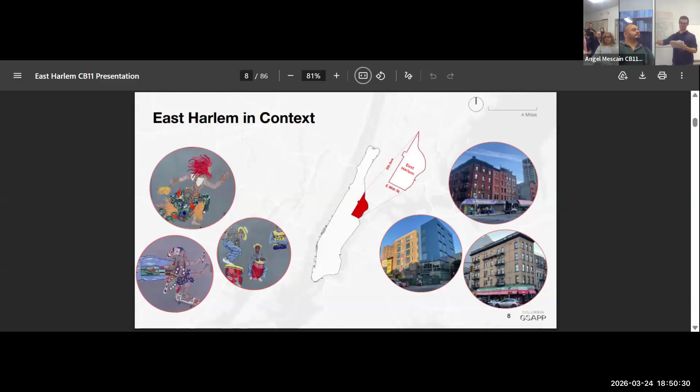So locating our site, we're focusing on East Harlem, a culturally rich neighborhood located in Upper Manhattan, as all of you very well know. This neighborhood is represented by community board 11, which is bordered by East 96th Street to the south, 5th Avenue to the west, and the East River and Harlem River to the east.

East Harlem has a very rich history of immigration, from being an enclave of Italian, Jewish, Irish, and German immigrants in the late 1800s to the Spanish Harlem we know today. Almost 100 years ago, a subway line along 2nd Avenue through East Harlem was first proposed by IND and approved by the New York City Board of Transportation. Today, we're finally seeing this long overdue promise begin to take shape.

East Harlem, El Barrio, is a neighborhood with a very vibrant past whose culture had a profound impact on New York City and the world at large. During our many site visits throughout the neighborhood, we felt that history in the murals, music, and the strong sense of pride that still defines the neighborhood to this day. Just like the generations before them, residents continue to make their voices heard in shaping the future of El Barrio.

We'd like to now provide a very quick overview of the 2nd Avenue subway, starting with phase 1 and the current status of the phase 2 extension. This massive infrastructure project, receiving $7.7 billion in investment backed partially by the federal government, will bring the Q line to East Harlem.

Phase 1 of the 2nd Avenue subway began construction in 2007 and was completed in 2017, extending the Q line to the Upper East Side with 3 new stations at 72nd, 86th, and 96th.

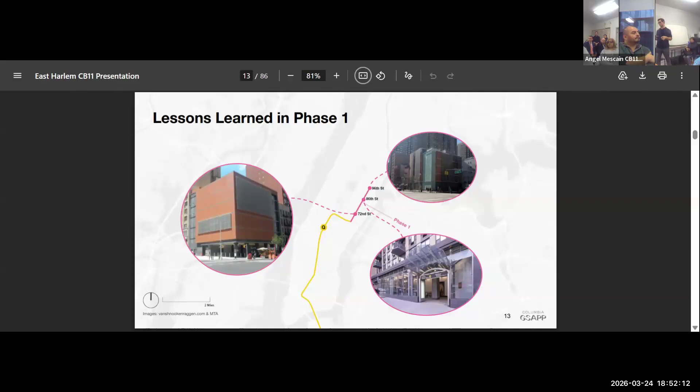From phase 1, the MTA learned the importance of using larger off-street staging areas to reduce construction risk and impacts. Not only will phase 2 use ancillary facility sites for staging before construction, but they also seek to design those ancillary facilities for future use as mixed-use structures with ground floor retail, to better activate and integrate these structures within the streetscape. So phase 2 will bring 3 new stations at 106th, 116th, and 125th and Lexington Avenue.

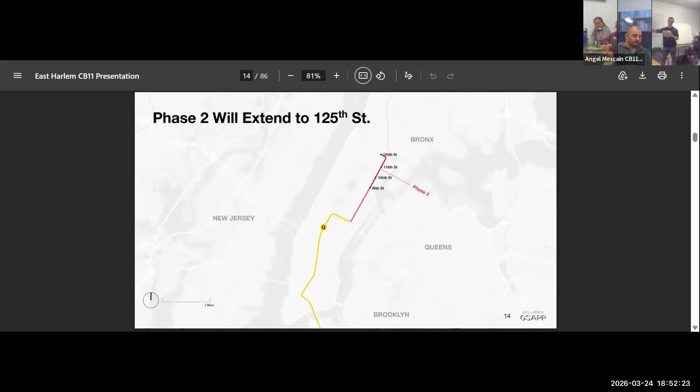So this is kind of where we are right now with the MTA - I think the MTA team will probably do a much more in-depth job of explaining this than I could. But the MTA has awarded contracts to relocate the existing utilities and to facilitate construction of the future 106th Street station, and constructing the structural shells for the 116th and 125th Street stations.

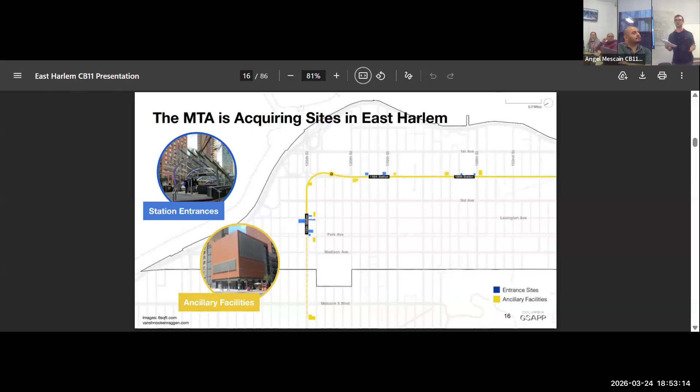Because of the larger building footprints required for the phase 2 ancillary facilities, the MTA anticipated more displacements and complexities in construction and demolition than in phase 1. To reduce displacement, the MTA has prioritized vacant lots and buildings for acquisition.

With these acquisitions, demolitions, and construction activities of MTA leading to disruptions along 2nd Ave, their outreach to the surrounding community has been all the more important. This has involved a grassroots approach that includes holding outreach and community meetings with residents, tenants, and organizations, and the Community Outreach Center.

In the acquisition of these sites, the MTA has projected a total of exactly 505 commercial employees and 170 residents from 65 residential units being displaced.

Currently, and this was at the time of creating this presentation, a month ago at this point, 4 commercial units and 4 residential units have been relocated, with 4 more residential units in process.

The acquisition of these lots will either be full or partial taking, depending on the MTA's needs for easement, staging area, and construction space.

The MTA's authority to acquire these properties through eminent domain is rooted in the 5th Amendment, which states that government takings of private property for public use must be justly compensated as well as follow due process.

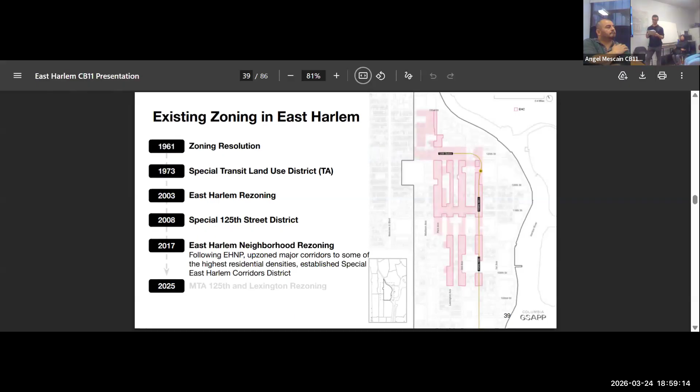The East Harlem neighborhood rezoning in 2017 upzoned major corridors to allow some of the highest residential densities in the area's history. It also created the Special East Harlem Corridors District to guide this growth along key avenues while, very crucially, tying development to affordable housing requirements.

In 2025, the zoning for specific MTA-acquired lots around 125th Street and Lexington Avenue was changed from C4-4D to C6-11, raising the FAR, or floor area ratio, to 15. This is higher than it has ever been before in the neighborhood and allows for substantially greater density and commercial intensity. This rezoning aligns with transit-oriented development goals around the Metro North and subway hub, reinforcing 125th Street as a major regional center.

By tracing this trajectory of East Harlem zoning history, we see both sentiments of anticipation for transit-oriented residential development and consideration for preserving the existing built form while balancing economic development.

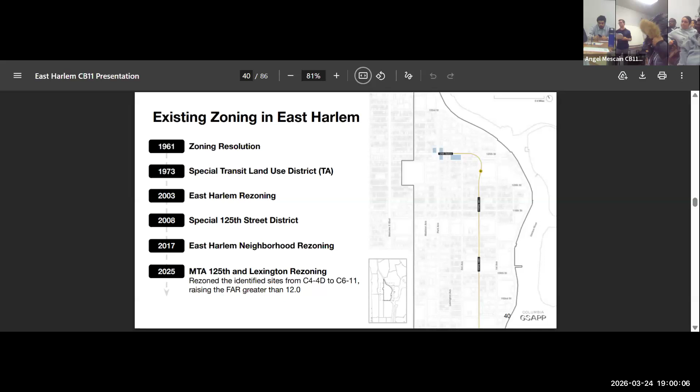And to talk a little bit more about the community, I'm going to pass it to my colleague, Charlie.

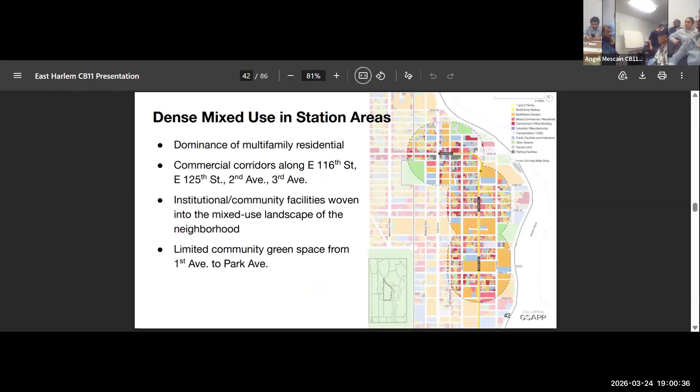Thank you, David. Just with these current conditions of East Harlem in mind, we move on to considering the voices of various actors involved in the Second Avenue subway extension.

East Harlem community members have expressed a number of concerns related to the extension. In the short term, residents and businesses are being displaced or relocated, and the streetscape is being altered for construction. In the long term, community members are worried about neighborhood change, the affordability of housing, and the design of MTA facilities.

The media is paying attention to this project. Local newspapers have highlighted the effects of the MTA's takings on both property owners and residential and commercial tenants. Property owners and the MTA are tangled up in courts, while tenants are informed that they have to vacate their apartments and business spaces.

Cheek Diop, a commercial tenant in a building set to be acquired for the 116th Street site and owner of the Tuba African store, also reports confusion arising from the property acquisition process. The MTA showed him several alternative spaces for a store, but then the communication ceased.

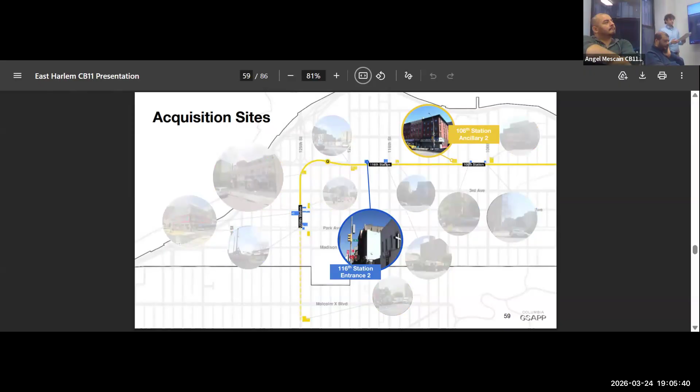The first of these sites was the 106th Street Station Ancillary Facility, located on the corner of 109th Street and 2nd Avenue, which will contain a ventilation plant. This site comprises 6 lots, one of which previously contained a grocery store. We chose to analyze the site because of the potential to bring back a grocery store to this area while capitalizing on fresh district zoning bonuses to provide extra affordable housing.

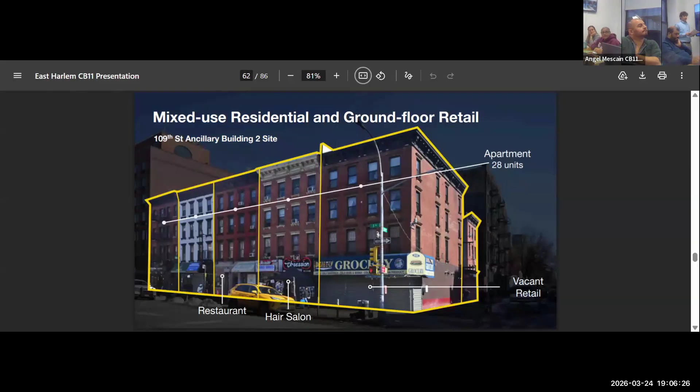Currently the site has a low density profile—note the larger buildings off the corner of this lot. Here we identified the 6 lots as currently hosting mixed-use properties with street-level retail and apartments above. There are a combined total of 28 residential units, but few are currently occupied.

Considering the zoning, the site exists within an R9A residential district, a C2-5 commercial overlay, the East Harlem Special District, and the Special Transit Land Use District, which, when combined, allow for a high-density mixed-use building with ground floor retail.

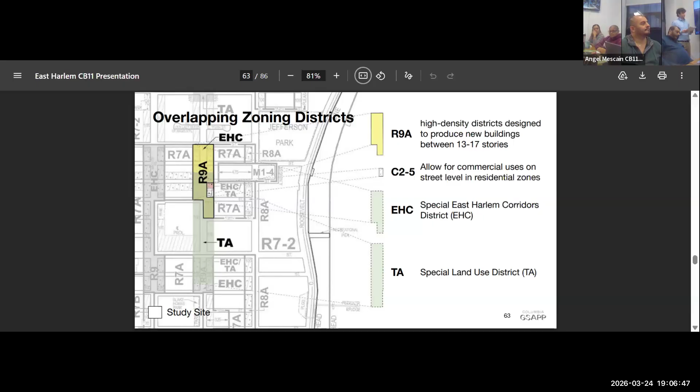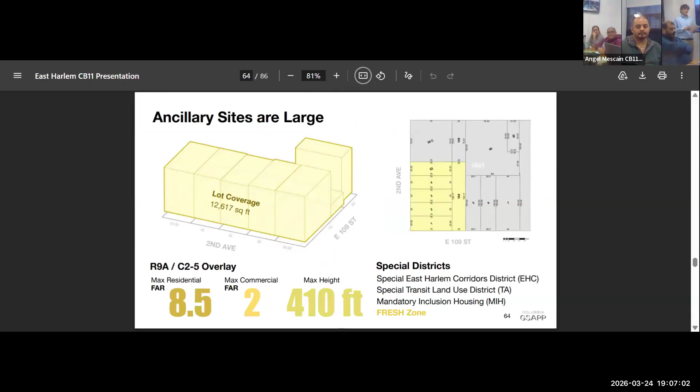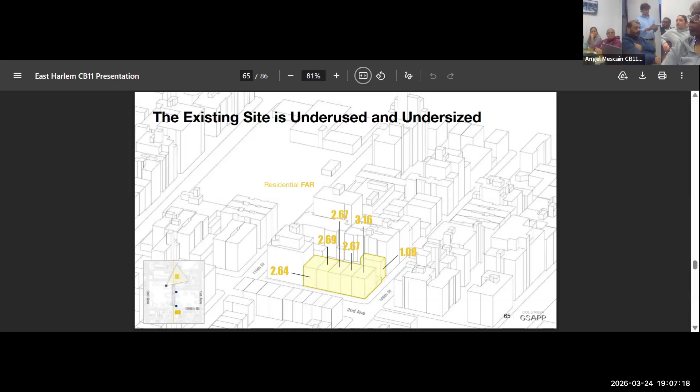We considered the combined site's large total lot coverage, maximum height, and FAR, by which the site could be developed given the overlapping zoning, which allows for a max FAR of 8.5 and a max height of 410 feet. This demonstrates that while the largest building on the site only has a 3.16 FAR, the site's zoning conditions allow for a much higher density.

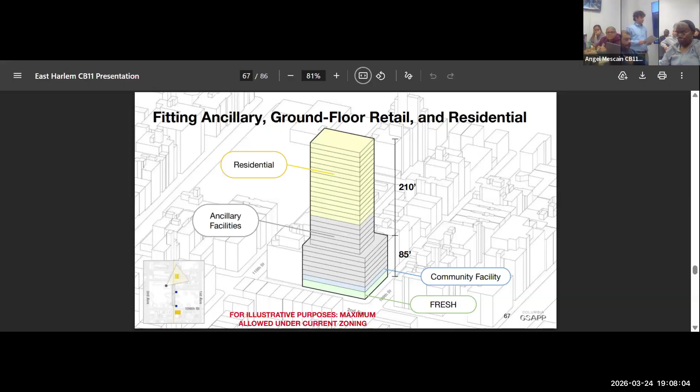Now we turn to 116th Street, our second site that we chose to analyze. We chose to analyze specifically Entrance 2, consisting of 4 lots located on the corner of 118th Street and 2nd Avenue. We chose to analyze this site in conjunction with the ancillary site to explore the distinct development potentials of different facility types, and because of the different zoning provisions that apply to this site, including a possible zoning floor area bonus through zoning for accessibility.

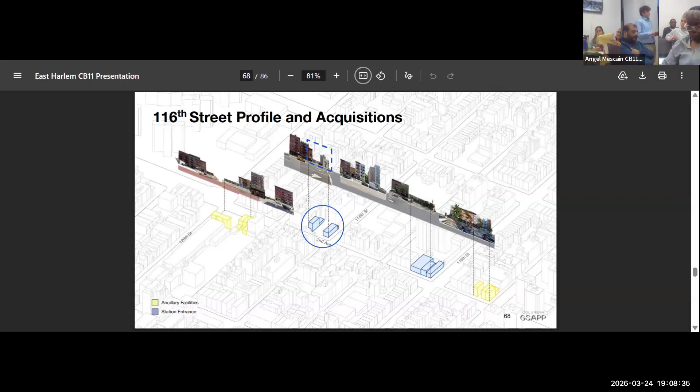Taking a closer look at the site, we observe lower density vacant lots. The current uses of this acquisition site include a 3-story mixed residential and commercial property, a church, and a parking lot. There are a total of 5 residential units in the apartment building to the left.

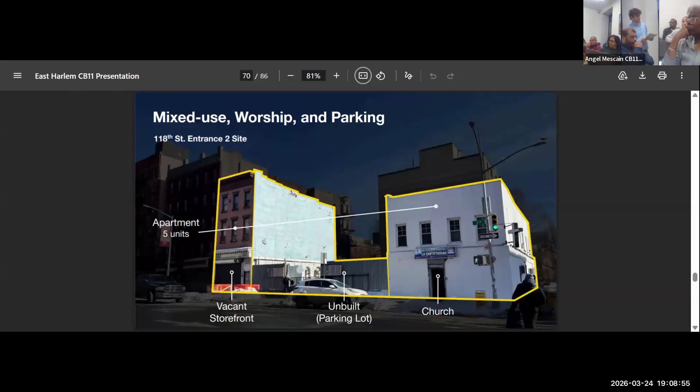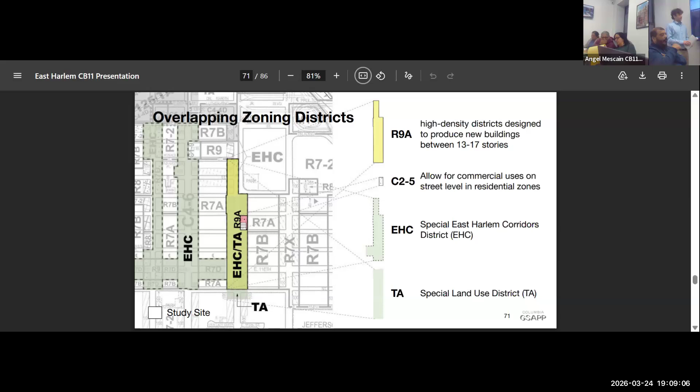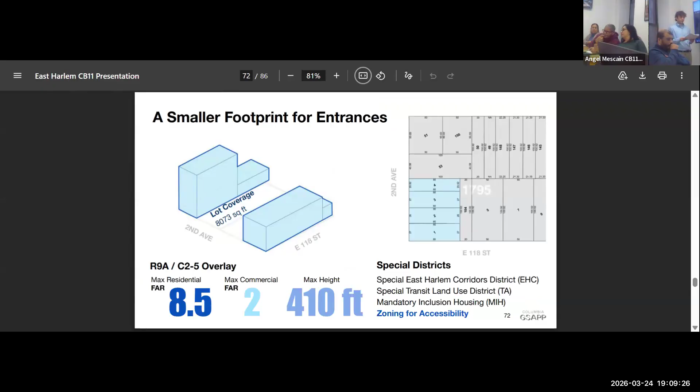So this entrance site falls into the same zoning designations as the 106th Street ventilation plant, similarly allowing for high density residential and additional bonuses. Although this site has a smaller footprint than 106th Street's ventilation plant, as an entrance, the MTA can take advantage of the zoning for accessibility provisions to work with developers on the site to include either entrances, elevators, or emergency egress in exchange for a residential FAR bonus of up to 20%.

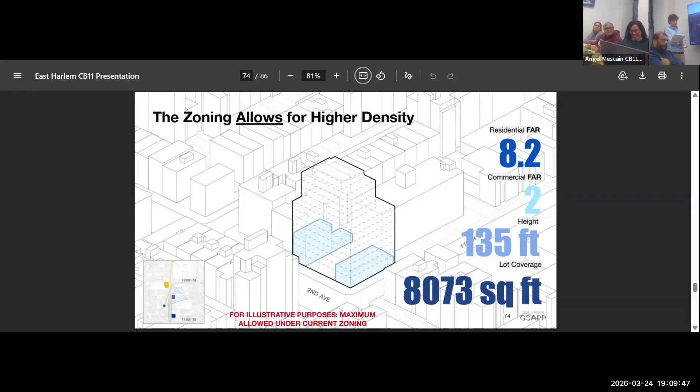Turning to this aerial view helps contextualize the underbuilt FAR that's currently there on site. The entrance site could take advantage of existing regulations and zoning bonuses allowing for higher density, placing a substantial number of affordable residential units and community facilities within immediate access of the new 116th Street station.

But how could we take these sites even further and imagine future development scenarios that could better address the needs of the community and the MTA?

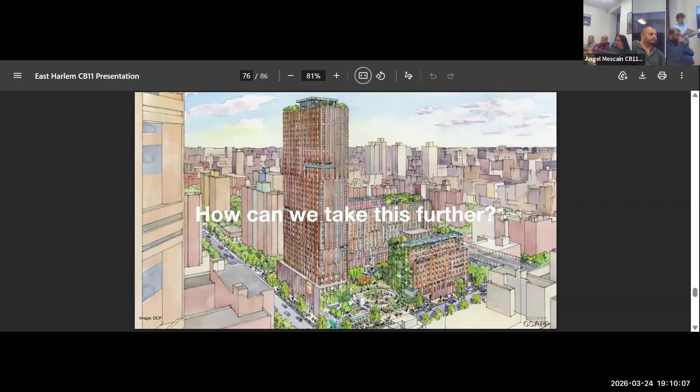The 125th Street rezoning may serve as a model for allowing for higher density that supports additional affordable housing development in an area overlaid with mandatory inclusionary housing. The rezoning, unanimously approved by Community Board 11, raised the FAR to a level unseen before in the neighborhood. An MTA proposal would bring a mixed-use residential development.

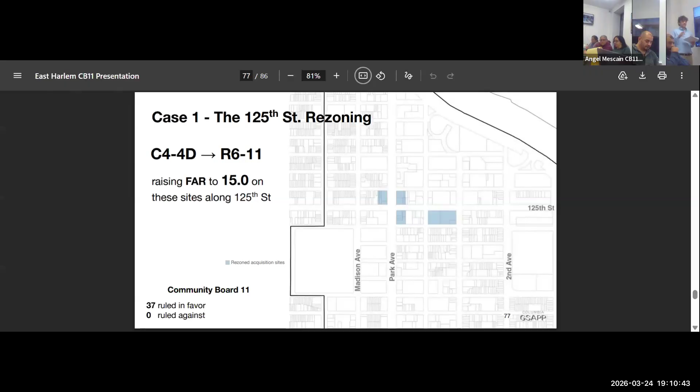It would bring a mixed-use residential development to one of these sites, including 684 units, of which 25% and potentially more would be affordable.

The construction of the National Black Theatre on 125th Street, following a rezoning of the current site through the ULURP process, serves as another use case allowing for higher density. This rezoning upzoned the site from a C4-4A to a C4-7 zoning district, and through leveraging zoning bonuses, raised the FAR to 12. It shows us what higher buildings may look like along 125th Street.

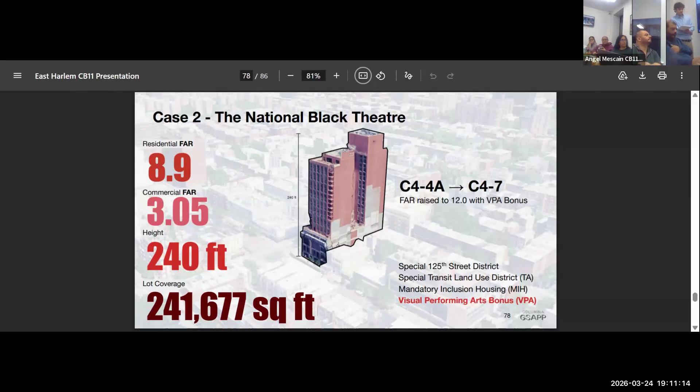We see future opportunities in using the MTA disposition, development, and city rezoning processes to increase allowable and built densities on ancillary and entrance sites along the Phase 2 extension. Given the complexity of zoning instruments, we hope to further explore opportunities in our next steps.

And so, returning to our charge. For the research we presented, we want to return to our initial charge and consider some of the pathways we've outlined for further exploring and communicating opportunities for creating public benefits to meet both infrastructural and community needs on these acquisition sites.

Moving forward, we are taking an iterative approach to refine our recommendations for Civitas on the 2nd Avenue subway extension with a focus on two key areas. First, we are expanding our zoning analysis across additional sites to test new possibilities that can ultimately lead to development proposals. Simultaneously, we hope to better ground our work in community voices, and we look to you for guidance on who we should be speaking with, which local organizations to engage with, and whether there are any upcoming events where we could listen and potentially join in on a conversation.

So let's go back to where we stand now. Through this presentation, we've considered the context in which this project takes place and where Civitas, MTA, and East Harlem's community interests meet, examined the tools at the MTA's disposal, defined our notion of public benefits, and highlighted a great need and opportunity to diversify the housing stock and retail options to make the area more livable for East Harlem residents, workers, and families.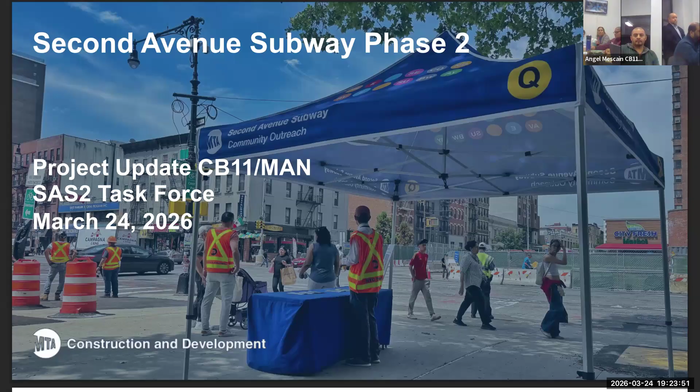So thanks for having us here tonight. My name's Joe O'Donnell. Like most of the community board already knows me from past presentations, I am the Director of Strategic Initiatives for MTA Construction and Development. We are the arm of the MTA that builds the capital projects and expansion projects for the MTA. I was part of phase 1 of the Second Avenue Subway project, and I am part of Second Avenue Subway Phase 2 and several other projects for the MTA. Around the room, I think we probably have half the room occupied with our community outreach team—community outreach representatives from Contract 1, Michelle, Alejandra for Contract 2. You all know Hector from El Barrio, he is leading up our community outreach efforts here in East Harlem. We're also joined by several members of the team in the audience, and online we have project executives as well as more outreach team members. So pretty robust attendance tonight—hopefully we can address most, if not all, of your questions. Next slide.

So tonight's agenda, we're going to do an overview and level set where we are with the project. For those who may not know, Columbia already did a fine job level setting where we are, so I don't want to repeat too much of their baselining efforts, but I'll cover a bit about the overall health of the project. I know we had an elected official briefing yesterday, and some community board 11 members participated, so some of this will be redundant, but for the rest of you we'll get everyone on the same page. We'll talk about major upcoming work on Contract 1, major upcoming work on Contract 2 now that it's been awarded and ramping up. I know there was a question about some of the ancillary buildings and their uses beyond power, communications, and signals. And then obviously community engagement and questions.

Next. So again, just the levels. Ooh, where we go? I thought I stepped on a cord.

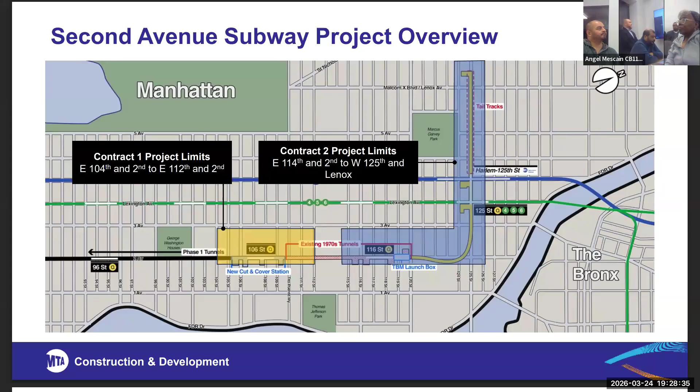Next slide. So as I mentioned, contract one was already awarded in 2024 to CAC Industries, and that is ongoing. Contract two was awarded in August of 2025 to C Plus Partners, and that is currently ongoing. You may have seen in the news, and we mentioned at our MTA Capital Project Committee on Monday, that we are ready to award contract three, which would build out the tunnels and stations for the 106th Street station area.

We are currently waiting on concurrence from the federal government. There's been some conversation with them about the funding for the project, to make sure we still receive the funding promised in order to move forward with that contract. We have confidence things will get worked out and we'll be able to proceed while we continue to advance contracts 1 and 2. But to safeguard our investment and the future of this project, we have filed an injunction in federal court to make sure that we get our money.

And then eventually contract 4 will come in and do all the fitting out of the stations and the testing and commissioning to get us up for revenue service. We project a revenue service date of 2032, which is less than 10 years away. I heard you say 10 years, but hopefully less than 10 years away.

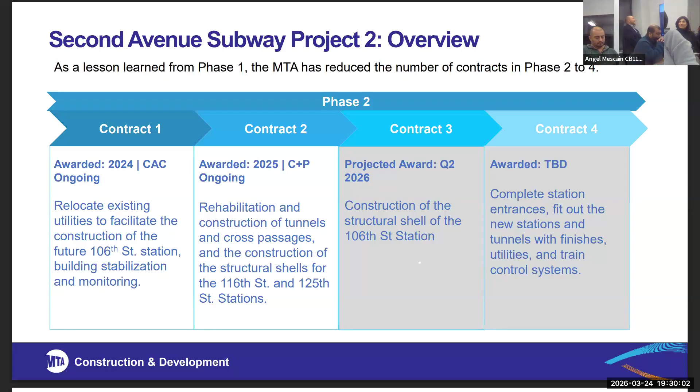Next slide, please. So the limits for contract 1 right now are 104th Street to about 112th, just south of 112th Street. As I mentioned, that's for the utility relocation in contract 1, also monitoring equipment for air, vibration, and noise. We're doing some building remediation. There are several buildings along the project alignment that we are not necessarily acquiring, but through investigation and communication with some of the business owners and building owners there, we've identified these buildings.

They're 100-year-old buildings on rubble foundations. They may not react well to our construction, which is going to be considerable in the area. So we're going to go in on the MTA's dime, no additional expense to the owners, and stabilize those buildings. There's the utility relocation, which is the primary objective of C1. Obviously, my friends over at Franklin Plaza, speaking to you, Leslie Cologne.

There is a whole host of MPT, or Maintenance and Protection of Traffic, which are those Jersey barriers and fences. We're pretty much inundating Franklin Plaza right now on three of the four sides of their properties between First Avenue and Third Avenue, with all the utility work going on there. And then there's the remediation of any environmental and hazardous materials, some asbestos and lead.

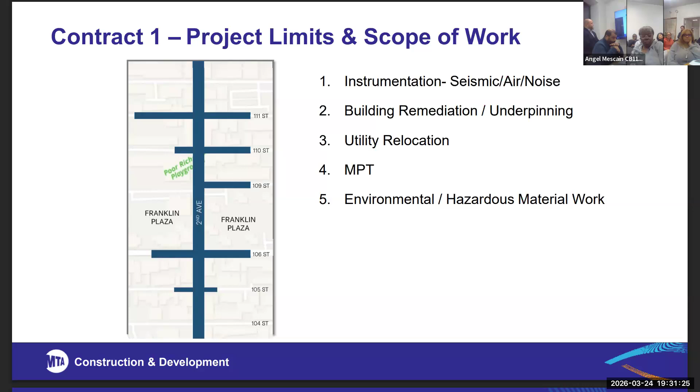Next slide. So, contract 1 update. Next. So here's some of the work that's going on at present.

Over at 105th Street, we're working on the gas main there in front of East Harlem Tutorial Program, working very collaboratively and collectively with the school. We've done a bunch of presentations to the school as well as the PTA there. We also work with the school to host our construction advisory committee meetings, which we hold quarterly. We hold separate and distinct construction advisory committee meetings.

Another lesson learned from phase 1 is that the residential and retail communities have very distinct needs and complications based on the construction. So in order to dedicate our focus to those distinct needs, we have separate and distinct meetings where we give them updates. We give the community updates on what's going on with the project, and they have a direct line of communication to us and the project executives, so they can hear their concerns and, if possible, effectuate real change.

In the upper right-hand quadrant, you see some of the electrical conduit work on 2nd Avenue proper. Lower right-hand side, that's for sewer pipe in front of the rear end, or the north end, of Franklin Plaza Associates, just prior to the Tito Puente Educational Complex. It's around 108th Street. And then on the lower left-hand side, that's Con Edison vaults going in at 106th.

We replaced the Con Edison vaults both at 106th and 108th Streets. So Con Edison is busy now reintegrating their utilities into those vaults. We do work collaboratively with our agency partners, Con Edison, DOT, DEP, Verizon, to make sure that while we're there...

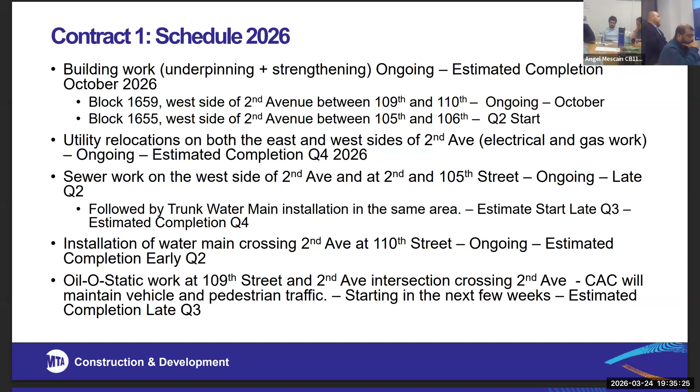So on to contract 2 and what's going to be going on with contract 2. As I mentioned, contract 2 is largely for the tunnel boring operations and the retrofitting of the 116th Street station.

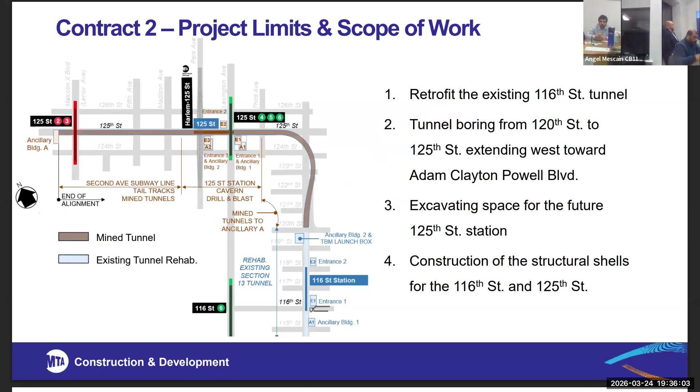Some of the work that's currently going on is there's a lot of geotechnical work, despite our coordination with our agency partners. A lot of the blueprints and as-built drawings that we get from our agency partners, sometimes they're 100 years old and haven't necessarily been updated recently. So in order to make sure that we're not negatively impacting utilities, running into any curveballs, or potentially putting our workers at any risk, we go in and we do a lot of geotechnical work.

Test pits and boring samples. This allows us to confirm the geological conditions underneath where we're about to be working, and in those areas where we're doing test pits, those are usually 8 or 10 foot by 10 foot hand dug test pits to confirm the drawings that we have, to make sure that we know what we're getting into there.

There's secant pile work going on at 125th Street, both at 125th and Lex and 125th and Park. We have acquired those lots. And similarly to the adverse soil conditions at 106th Street, where you have to dig from above because it's sand. If anybody has ever tried to dig a tunnel or a pit even on a beach, you're always fighting against it. The walls collapse on each other and it caves in.

So we put in these secant pile walls to create an artificial wall to hold back the earth while we're digging deeper. We're going to connect at 125th Street into the existing footprint of the Lex line station, the 4-5-6, and we'll actually be below the 4-5-6 once we build our station and platforms for the new Q service running into that existing 125th Street station.

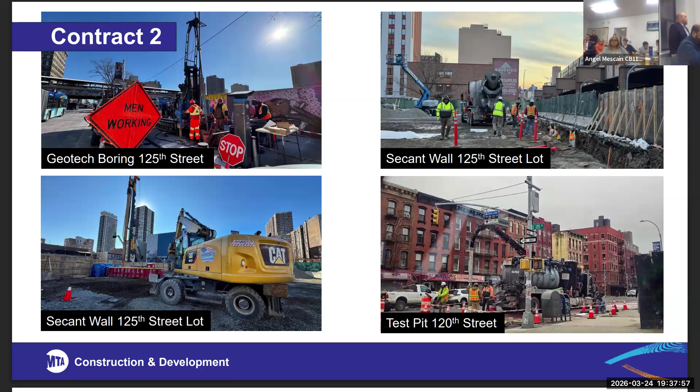So those C-Camp piles are going in now, both at 125th and Lex and 125th and Park. And you can see an example of a test pit and some more geological work being done in the lower right-hand corner.

So upcoming work for the contract 2 work, we're really starting to get into the work that's going to have publicly facing impacts. Despite the size of the machinery going on at 125th and Park and 125th and Lex, that's all inside our footprint, so there isn't any real negative impact to the surrounding community there. We are getting into work that's going to be publicly facing and have potential impact.

So one of the things we're going to be doing is starting this Friday, some of the preliminary work of setting up the MPT, first with barrels and then eventually with Jersey Barrier, already underway this week. Starting Friday evening, we're going to be milling 2nd Avenue, taking up all of the existing striping for the lanes and crosswalks so we could put down a new lane configuration and crosswalks from 121st Street down to 115th Street.

Because what we're doing is we are shifting all of the traffic from the west side of the street to the east side. The first thing we did was take out the bike lane, the parking, and the pedestrian refuge islands on the east side so we could shift the traffic over, because we're going to be working and launching that tunnel boring machine from the west side. So we've done all that preparatory work.

We're taking out the lines and putting in new lines, striping on the 27th. If all goes well with weather and no curveballs, we anticipate that work being done by the 28th, and there will be a new 3-lane configuration. We're reducing 2nd Avenue in that stretch from 120th to 116th, and then it'll switch back to 4 lanes at 115th Street.

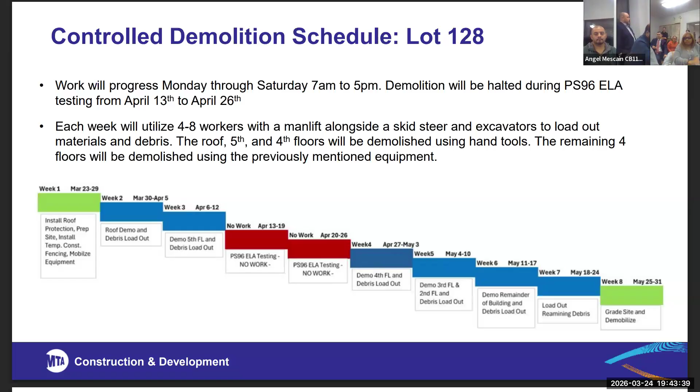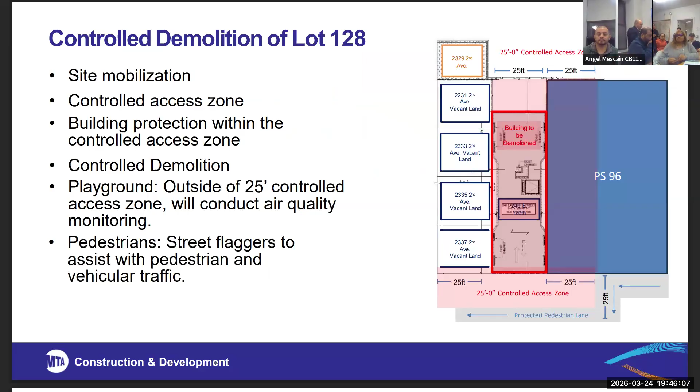Next slide. Part of the controlled demo, as I mentioned, is taking the initial floors down by hand. Site mobilization has started this week. We've implemented that controlled access zone. We're going to start controlled demolition next week. One of the questions we get, and that we've already had conversations with the school about - could you go back one slide? It shows it a little bit better.

One more. So we get a lot of questions about what are we doing about the demolition and containment when the kids are out at school. They're considerably outside at recess, outside the 25-foot containment area and buffer zone that we're mandated to implement to make sure that folks are safe.

One of the things about dust and airborne material is they dissipate as they get further from the source. So we have monitoring equipment at the localized area where we're doing the work. Someone in our work crew will have monitoring equipment with them so we're safeguarding our workers. Not only will we have it inside the building and inside the containment area, but we'll also have it outside the containment area.

Not only will we have it outside the containment, we'll have it on the school as well. So we have great confidence that we'll know we're having elevated readings proximate to our workers before it ever gets to the point that there's any elevated readings proximate to the public. It would have to go through 3 tiers of environmental monitoring before it got to the point where there would be a concern for the public.

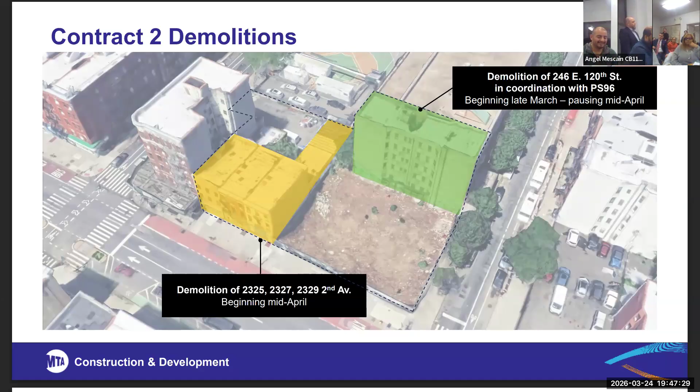Sorry to make you go back. So now 3 more slides. I think it was up front. One more, I think, yeah.

Some of the protection measures for the school, specific to the school, as we remove those top floors with hand tools, we're going to be applying roof protection to the school. So we're not only putting plywood around the roof itself, but we're also putting 2 layers of plastic around any exhaust at the school to make sure there's no infiltration of dust or material into the school itself.

We are also wrapping the exhaust only. My bad, we need to make sure the intakes are still open so that air can get into the school. And then we're also covering the windows. The 3 floors of windows on the 120th Street side and the back side of the building are going to get 2 layers of plastic sheeting to ensure nothing gets through and into the school.

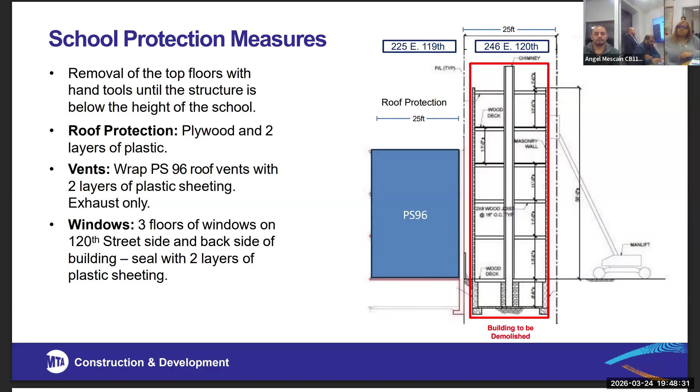Next slide. This is that lane shift that I talked about. So what we've already started doing is putting up some of the Jersey barriers you see in yellow, which demarcate where we'll be doing our work. The teal and green areas are where PS 96 and our launch box are. We're also going to be putting up an ancillary entrance down here at 106th Street. So there will be shifting of traffic to the east side, consolidating into 3 lanes for 3 blocks before it shifts back towards the west side, still in that 3-lane configuration, until it returns to 4 lanes at 115th Street.

Along with those lane shifts, where we're putting up these MPTs to shift traffic and protect our work zones, the businesses and residents there no longer have street frontage to put their garbage out. So we've coordinated with DSNY to identify suitable alternative garbage location areas, and also coordinated with DSNY so their workers know where to find that garbage. The brown areas are indicative of those areas DSNY has identified as suitable alternative garbage locations.

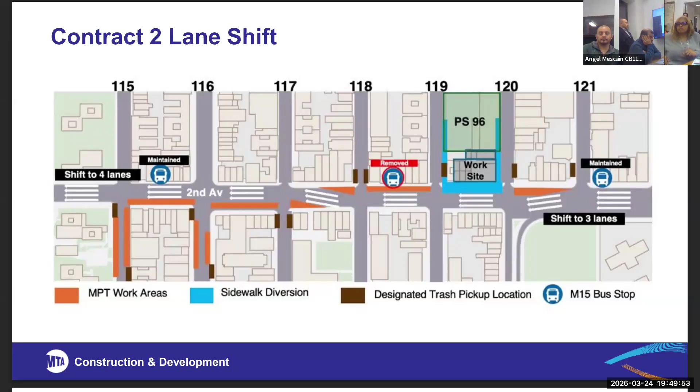And we've already been out hard at work. Alejandra and team have been out going door to door to educate folks on this move, as well as what's going to happen with the garbage relocation. Next slide.

Some of the signage concerns, I know we get a lot of questions about signage that we do have at present and what we're doing for the future. I've already spoken to the community board about some of the signage concerns around contract one.

Well, we hear it from the local community first, and you guys at the same time, so we're getting it from both ends. One of the things we did, we're a transportation organization, right? We hear from a lot of folks, and we may hear from a florist, I don't know what we're going to hear about. Someone's going to have to translate for me, but we do hear about business impacts, and unfortunately we do our best to try to mitigate those construction impacts. There's only so much we can do, right? If we have a budget for a project, it's earmarked, it's taxpayer dollars to build that project.

We don't have extra money that we can share or give to help alleviate some of those business concerns. But what we do try to do is work with those businesses to help them with marketing.

We'll create signage for the businesses. If we've got one of those MPT areas in front of them that blocks their frontage from street or pedestrian traffic, we'll work with them to put up signage so folks know they're open during construction. Sometimes if construction takes up an entire block, some folks may be wary, saying, I don't know, there's nothing open down there, it's all construction. We'll put up wayfinding at the beginning and end of that construction area letting folks know how many businesses are open on that block.

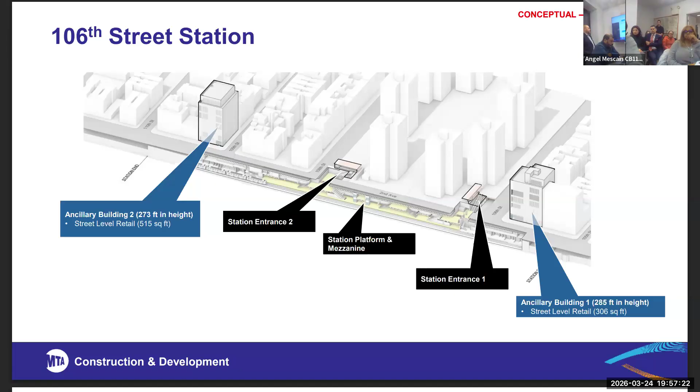As our friends from Columbia and Civitas pointed out, these areas are ripe for joint development. We don't know necessarily how high they are going to go or what the joint development will look like. We did contemplate at 125th Street what the 125th Street and Lex location would look like, and Columbia went through those numbers, and we've already presented the community board on that, with some projections for housing above the ancillary there, along with affordable housing, 25% of those numbers being affordable housing, as part of a rezoning effort that was going on there.

We had to make those projections based on the rezoning effort, but until we get further along in the project and actually have conversations with joint developers, we really don't know what creative minds might have for those structures above their utilization right now to support the subway. So more to come on those conversations as we progress with the project.

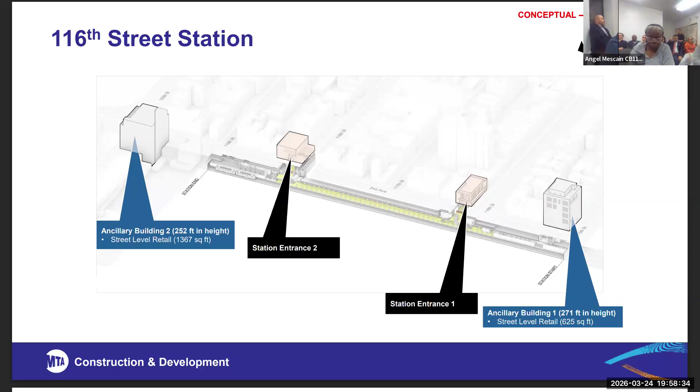I heard Nilsa say she does not want more groceries, so we'll contemplate other things. And then at 125th and Park, again, approximately 200 feet in height there, and a little bit bigger. The ancillary at 125th and Park is one of the areas where we've had some conversation with the community board and the congressman about potential community space in that location as well.

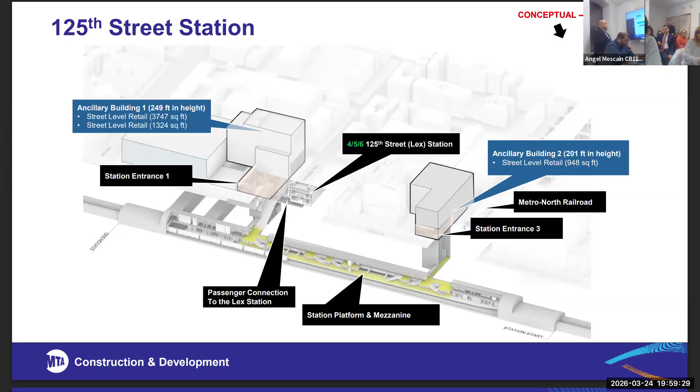Next slide. So some conversation on contract 3, just because it's in the news, and it'll be even more probably in the news after tomorrow when our board hopefully approves us to go ahead and award that contract, contingent upon some more confidence at the federal level.

But as you can see, we have a detailed schedule here in terms of the timelines that we anticipate needing to get into. So as I mentioned, contract 1 already awarded and started in 2024, anticipated completion 2027. In parallel, we've got contract 2 going in 2025, and that takes us out to 2029.

As soon as contract 1 is out of the 106th Street station area, we're going to be ready to go with contract 3, because that is to build out the 106th Street station area and the tunnel work there. So we really don't want to delay that.

We have the design all queued up. We've been through the RFP process with the contractors. We have a contractor identified, ready to go. We are seeking approval tomorrow at our MTA board to give us the authorization to award that once we have, I'll say, a yellow light — at least a level of confidence, maybe not a full green light — from the federal government that we're going to be reimbursed for their portion of the project, so that we can move forward.

And then later in 2027, we anticipate awarding contract 4, which is the systems and finishes contract. We've got some time on that one. Again, we have confidence based on prior contract awards. Part of the rationale behind why the federal government was withholding money was making sure everybody was doing their proper due diligence on the award of these contracts and who they were going to. We feel we're in a good place with that, so we think the federal government will see to do the right thing here.

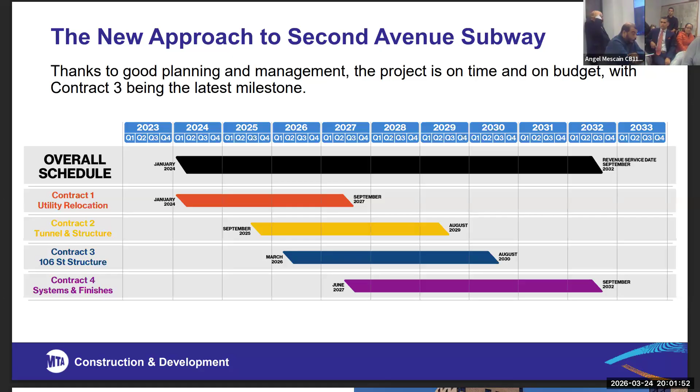As you can see, there's only 4 contracts associated with this project. Phase 1 had 10 major contracts with many more subcontracts underneath that. There's a confluence and interaction between those contracts — one waiting for another to finish — so if contract 3, for instance, was delayed, then 4 would be delayed as a product of that.

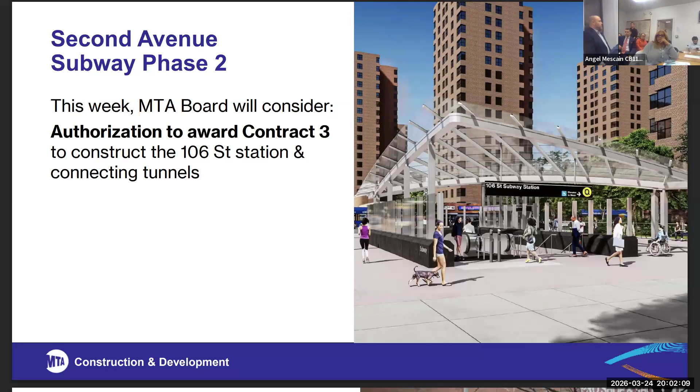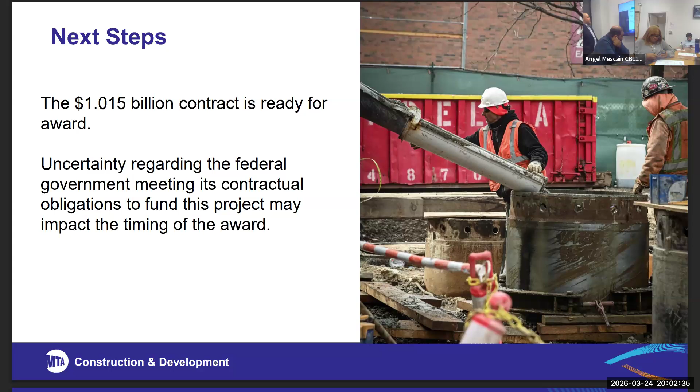Contract 3 is a $1.015 billion contract, and we just want some confidence around the current uncertainty with the federal government. There's been some lack of focus on awarding the funds needed to advance this project, so we just want to make sure everybody's focused on that before we move forward. Next slide.

From a community engagement standpoint, we've been out here. We have a brick and mortar location at 69 East 125th Street. We've been here since 2018, years before we put a shovel in the ground. One of the things we learned from phase 1 best practices is we implemented a community information center about halfway through that project. The one major knock we got was: why didn't we do it sooner? So taking that lesson learned, we opened up this brick and mortar location.

We staffed it with Hector and his team — 5 folks up there, largely from this community, 3 of whom are bilingual Spanish speakers. We've got a project management team with 2 members dedicated to community outreach and communications, plus Michelle and Alejandra, who are representatives of the respective contracts. So we have an abundance of community outreach resources.

If you're not getting information because you're not on one of our distribution lists, please get a hold of us to be added. If you're not hearing from members of our team, let us know, because as you can see in this bullet list, we do pop-up events. We have a branded 2nd Avenue Subway tent, which I think you'll see a picture of in a slide or two.

One thing we heard very early on, despite having that brick and mortar location, was that East Harlem's not like the Upper East Side — you can't sit in your office and wait for people to come to you. You need to bring the message out to the community. So Hector and his team take this pop-up tent out and target areas around the existing 4, 5, 6 lines, because that's where transit users are, to educate them on what's coming and the options they have.